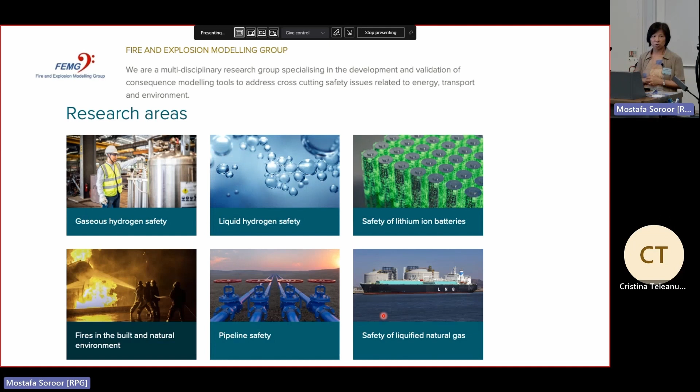We do download OpenFOAM, but we have our own versions where we put our submodels in, whether it's for the physics, the chemistry, the transition, evaporation. So we do all those sorts of things. Partly because of my interest, and partly also to ensure that publications from the group, for the benefit of the researchers, get into the top academic journals rather than just industrial applications.

So the majority of my talk will be based on hydrogen. I will talk about work in the gas hydrogen safety area as well as the safety of liquid hydrogen. And in the end, I hope to save some time to talk about the wildfires, which is my new hobby.

I don't need this animation.

What I'm trying to say is in potential accident scenarios, we are moving now towards a hydrogen economy, and hydrogen is going to be a major energy carrier. In that process, there's the production of hydrogen, the distribution and transport, as well as the storage, and finally the utilization. Through that process, safety is paramount, because there can be accidental releases of hydrogen, whether it's gas or liquid, and there are various scenarios which can happen, as I illustrated here.

Although hydrogen is really light, so it does have some benefit. If it's dispersed quickly into the atmosphere, that's good news. Liquid hydrogen, when it comes out, evaporates quickly. The volume expands by more than 800 times, so it's an enormous cloud. But if it can disappear quickly into the atmosphere without resulting ignition, then that's good.

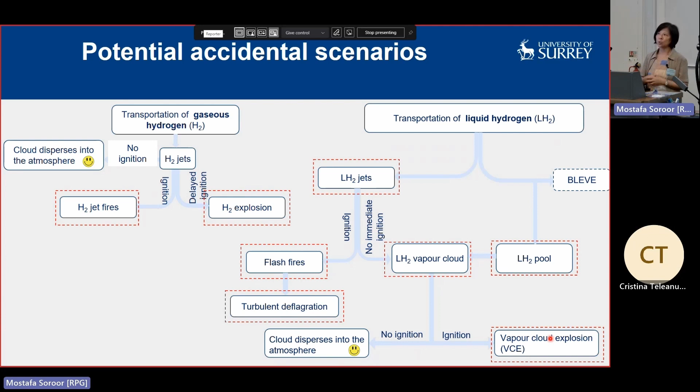So I will start with spontaneous ignition. It's less likely in the UK, hydrogen-powered fuel cell cars, but we do have some demonstration vehicles running around in the UK and more in the US. Typically in hydrogen fuel cell powered cars, the hydrogen is stored in high pressure cylinders. The Toyota Mirai stores at about 700 atmospheres, so it's 70 megapascals. And in refuel stations, gaseous hydrogen under pressure, 100 bar, is still a current commercial way of storing hydrogen, while liquid storage is another form.

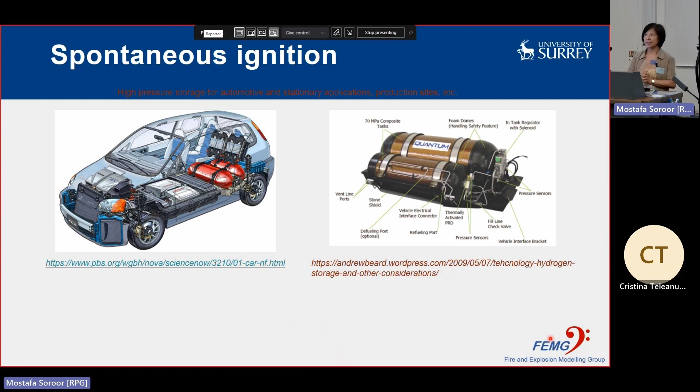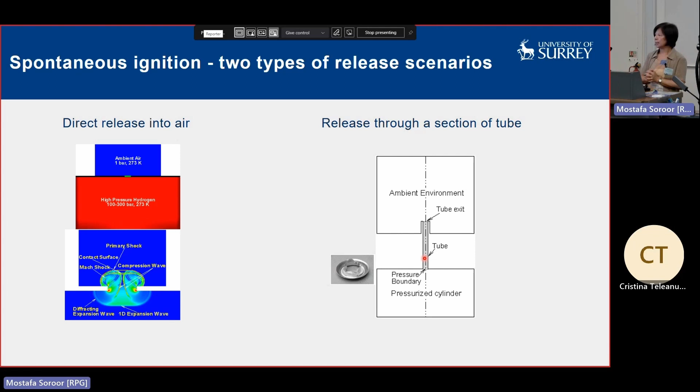Under such high pressure, the early work we did found that if there's a release from a pressurized storage vessel, shock waves develop, and at the front of that shock wave there's hydrogen interaction with the air, molecular mixing, which pushes the temperature up, and you can get spontaneous ignition, through a section of tubes. In most applications, hydrogen doesn't come out suddenly from a crack. It's more likely the connecting pipes are the weak points in the system, and if there's a rupture, hydrogen comes out through a section of tube.

There are experimental as well as numerical simulations done by my group which indicate there's great potential for spontaneous ignition in such situations. So theoretically it's possible, and experimentally it's captured by experimentalists in the UK, HSE, and in Japan, Russia, and China. So there are various experiments.

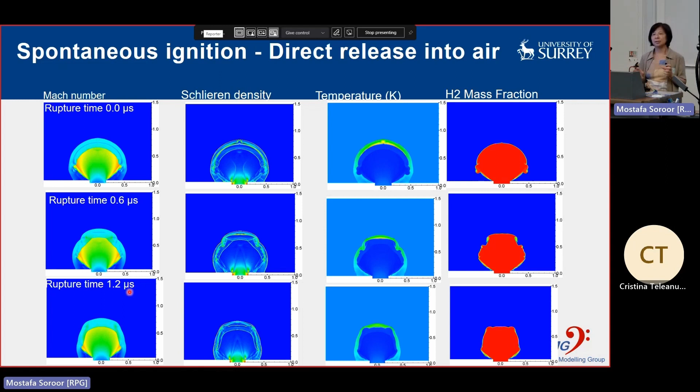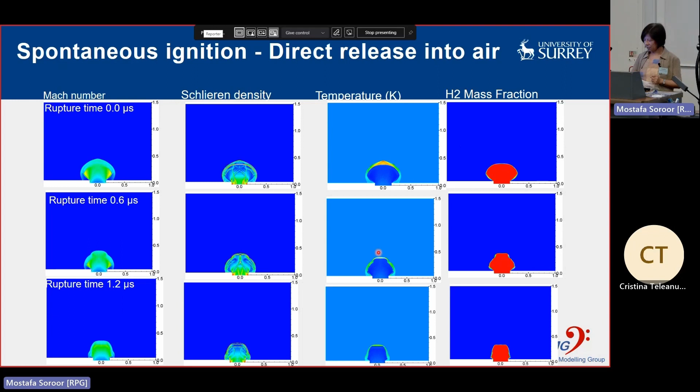What's shown here is the rupture time. If it's 0, that's a sudden release. If rupture time is 0.6 microsecond or 1.2 microsecond, we are trying to mimic practical situations where you don't really have sudden release; it takes time for a storage vessel to rupture. What we found for direct release is that in practice it's unlikely to result in spontaneous ignition. The temperature at the front would go up, but it quickly went down. It's diluted and quenched by the surrounding flows.

But in situations more likely in practice, released through a section of tubes, we are finding it's more likely because of shock reflection. You see here the shock waves reflecting from the tube walls, and the heating of the front of the hydrogen-air interface, which is more likely to result in spontaneous ignition, which can translate into a jet fire, which is the next topic.

But what I want to say is that behind all this and the animations you see here, we actually did a lot of development. I should clarify, this part is not done with OpenFOAM. I forgot my title is OpenFOAM. This was done with the KIVA code, which was developed for internal combustion engines by Los Alamos Laboratory in the USA. The reason we did it with KIVA rather than OpenFOAM is a key limitation of OpenFOAM: in terms of numerical schemes, it won't go anywhere above second order.

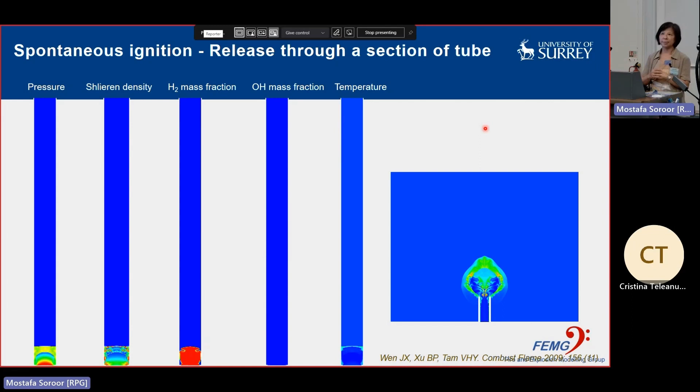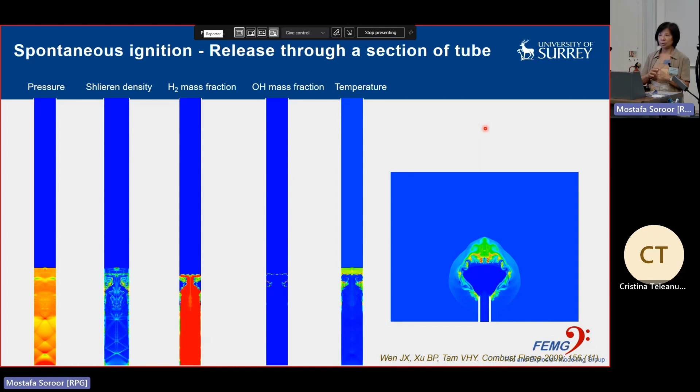Well, for this one, we need high order numerical schemes. This is a WENO scheme, which we implemented into our code, and we tested the third order, fifth order, and ninth order. And also, in order to capture these numerical simulations, we actually had to use very, very fine grids. So the grid resolution used in these simulations ranged from 5 microns to 10 microns, to 50 microns, to 20 microns. We tested a range of them against the classical scenarios where there are analytical results. So there's a lot behind these animations which I didn't talk about.

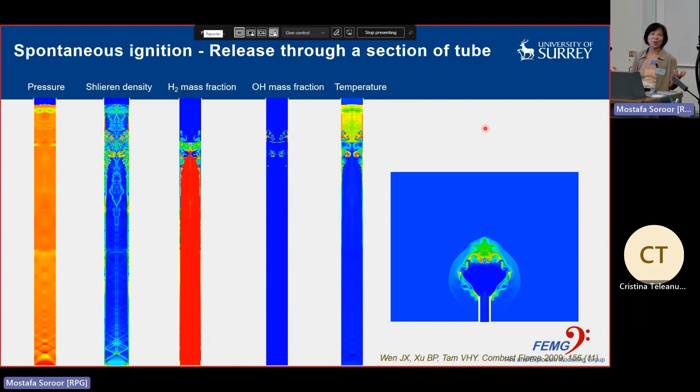And so what I have shown here are the advanced laser diagnostics which researchers in Korea did after our simulations. We did those simulations around 2008, 2009, and afterwards researchers in Korea did experiments. So qualitatively, we are capturing the phenomena which they saw: the near wall ignition, the shock focusing, and the transition from the spontaneous ignition to a jet flame.

But we didn't make a quantitative comparison because the grant finished. The grant finished after they did the experiments. We moved to do other things for hydrogen. And one of the other things we did was jet fires.

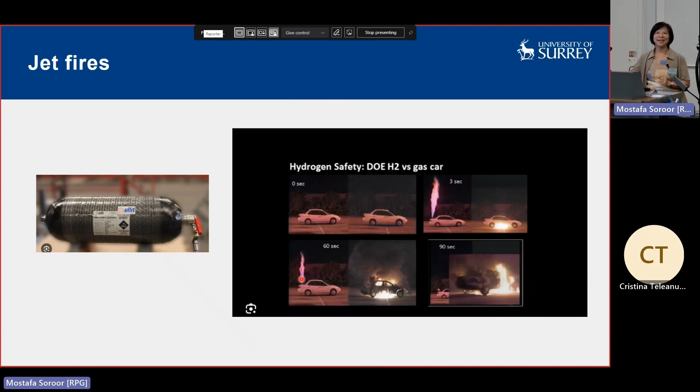Can I ask the audience? You can cut short my question time if I ask the audience now. Looking at these two fires, which one do you think is a hydrogen fuel cell car? Which one is gasoline? I'm not going to move my pointer. If you think this one is gasoline, put your hands up. How many people think this car is gasoline? Nobody. That's really good. So I don't need to explain jet fires, and I won't need to talk about this.

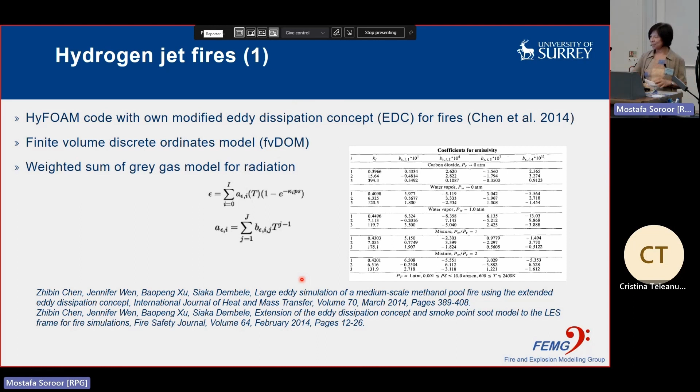What this is trying to show is how we treated the thermal radiation, and I'm going to bypass these developments. And this is again a pseudo diameter treatment which we use. The reason we did that is, for spontaneous ignition, I was talking about using 5 micron, 10 micron grids. When you go to a major fire and the jet fire, you can no longer do that. So we use a pseudo source to bypass the shock region, and then we ignite the jet,

which in practice, most ignitions of hydrogen, I think, are still by sparks or even mechanical friction, rather than diffusion-based spontaneous ignition. But the thing is, in most accidents, I was listening to some industry talks even last month, it's not clear what caused the ignition, even to the operator. So it's a mystery there.

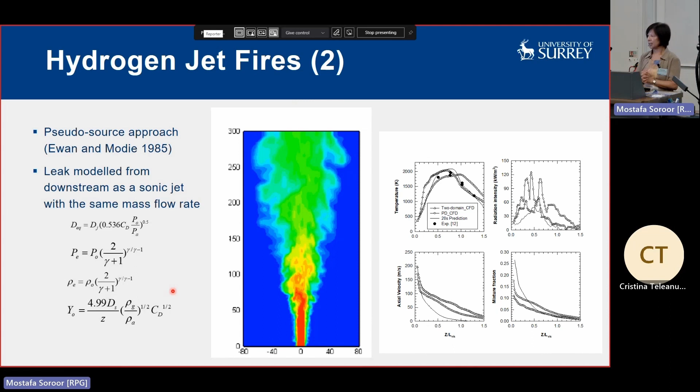So in jet fire simulations, we don't do those shocks. We bypass them with simplifications. We start from a pseudo surface where the pressure has reduced to atmospheric pressure, so we can use larger grids. And we look at the flame length. We look at the radiation levels and the radiative fractions and compare them with the experiments.

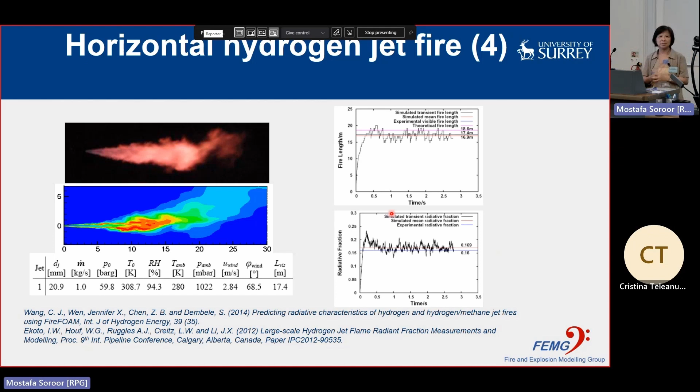What I would say is that in real situations, although we've done this detailed study, for jet fires, if you are not considering the obstacle effect, one could do well with some simple correlations, which I'm comparing with here. And the reason why people are still doing numerical simulations for jet fires is because operators need to consider them in connection with the fire impinging on surfaces and the environmental conditions, especially if this happens in a room like this.

And then another thing is when we talk about hydrogen, people think about Hindenburg, they think about explosions. So we have done explosion modeling in collaboration with some industrial partners who do experiments in a European project. What I'm showing here is experiments sponsored by Shell, and the tests were done at HSE, not far from here, pointing a jet fire.

This is really a worst case scenario. It doesn't mean it's going to happen all the time. It's a worst case scenario, pointing the nozzle directly at the floor. So you created the immense cloud. You also created that momentum, as well as the congestion underneath this model car. So we were using OpenFOAM to look at the explosions, comparing the overpressure.

And for this part of the work, I must say we did the least amount of modification to the code. What we did do is implement some correlations for hydrogen-air mixtures and the modification of laminar flame speed at different concentrations and stoichiometric equivalence ratios. So we did relatively little modification to OpenFOAM for this one.

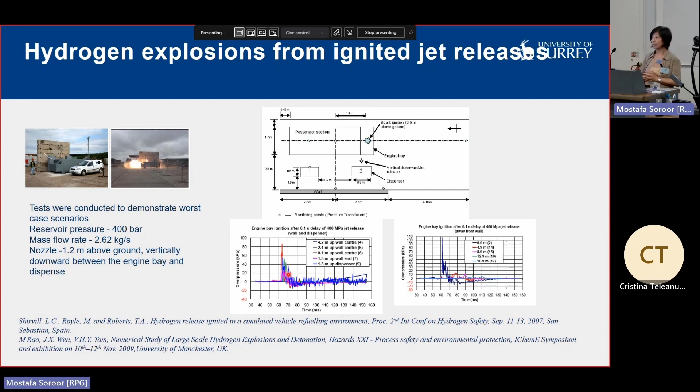And another thing which we did for this one is we also got to look at the ignition and how to ignite that in running the code. Sometimes, as a PhD student in fluid dynamics, you just spend your time on code modifications. So sometimes what we found is even if you don't modify the code, or with minimum modification, even getting a scenario to run on the computers takes a lot of skill, and how to treat the ignition and how to look at the boundary conditions, environmental conditions. So I think a lot of time was spent on that for this one.

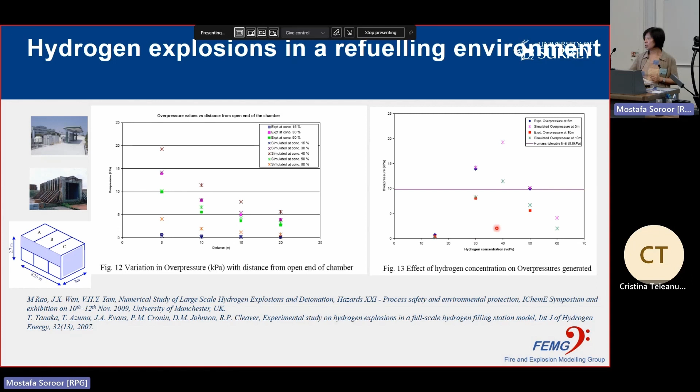And then we also looked at the other scenarios, again using the code to help evaluate the safety distances from a mock-up storage room like this, to see at what distances the overpressure could reduce to 10 kPa, which is the maximum allowed without causing too much negative effect to a human being there. And we do say that this is about the stoichiometric region. Around that region, you do get the highest overpressure.

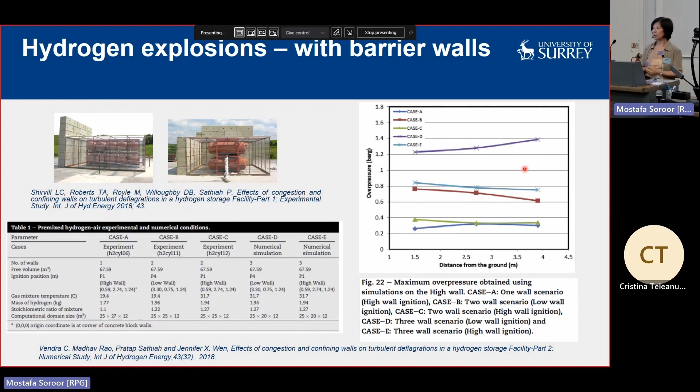And as I mentioned, more recently we've been working in a European project, and now I'm launching my own joint industry project on liquid hydrogen. The reason for that is hydrogen is light, its density is very low, and to store large quantities for the hydrogen economy, you either store it in high pressure tanks, like what you've seen, or you store it in liquid form. And also with the development of aviation and marine applications of hydrogen, we are going to see more liquid hydrogen storage

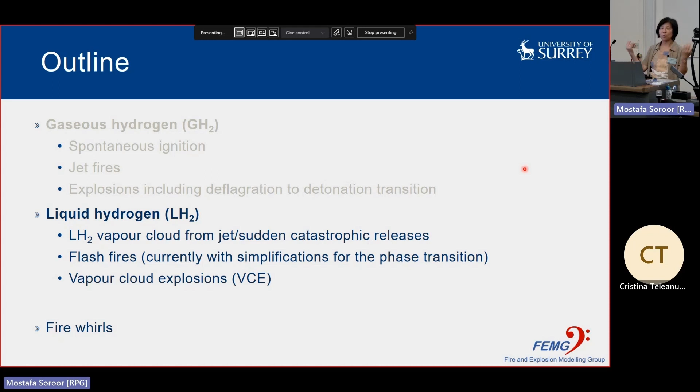internationally. But the concern is, at such low temperature, about 20 K, one would think that it should be safe. It's so cold. But it has its safety implications. As I already mentioned, it expands by more than 800 times with an accidental release.

So one thing which we looked at, we worked with Air Liquide, which is a French industrial gas company, to look at what's the effect if around the liquid hydrogen tank we put some bund to restrict the spread of the liquid in case of accidents, rather than it going too far away, and to look at the evaporation, the phase transition, multi-phase flow, and the dispersion in the atmosphere. So we did that work, and that work actually constituted a part of my impact case study for REF 2021. It's quoted in the REF. The work was also sponsored by a university Impact Acceleration grant.

I remember when the university asked me to apply for that, I said, no, I'm not applying for internal money. It's my job to bring grants to the university. It's not my job to ask for money. Then the university said the impact is worth lots of money to the university. By giving you this money, you generate another small example for the impact case study that could be really important. So that's how this work got done.

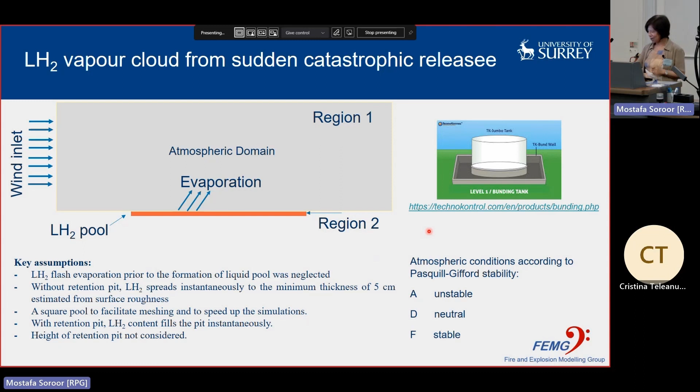And I will bypass the little bit of modifications. And there's a limited amount of data for validation.

What I'm showing here is some NASA experiments done in 1984 for liquid release, and they look at the cloud, and we made some comparisons in terms of the visible cloud and the vertical extent of the cloud, as well as the duration of the visible cloud. And so that's the only set of data we could find at that time.

But I'm pleased to say now, I think Sandia National Laboratory is trying to do some more tests like that. But initially, the results of the new test will probably be confidential, because the Sandia new test is sponsored by KGC in Korea. So I don't know how soon it will come out.

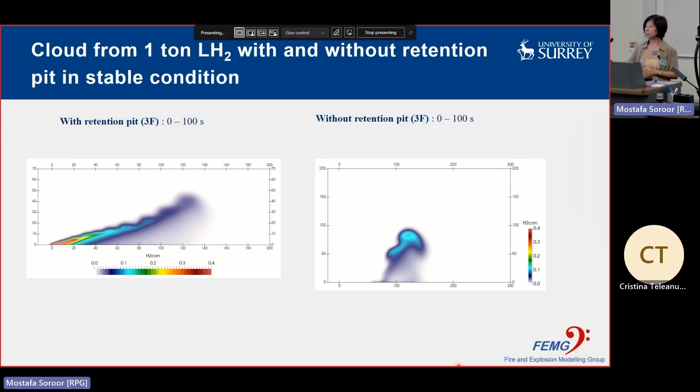So with that validation, we then analyzed them, and we compared them with or without that retention pit, or that bund you saw in the picture, to see what's the effect. And the conclusion which we draw from that study is that you have to analyze it situation by situation, the atmospheric condition and the size of the bund, because using that bund around the storage vessel, you do limit the size of the cloud, but its duration becomes longer. So it's more confined in that bund, and the evaporation is slower, dispersion is slow, but it lasts longer.

So I talked about hydrogen requiring little energy to ignite. So if the duration is longer, then it's more likely it could bump up with some ignition source. So really the operator's conclusion after doing this work is they would analyze it based on the local situation, but they do consider that the bund has some effect in certain situations.

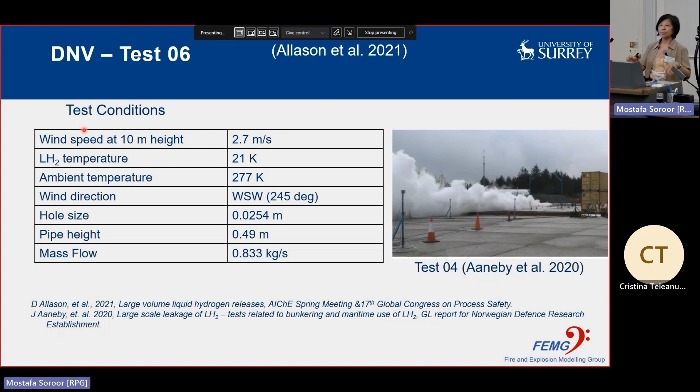And so these are the more recent tests, and it's done at DNV Spadeadam. Remember Spadeadam used to be under British Gas, and now it's been resold many, many times, and it's under DNV. They did some tests for the Norwegian ferry companies on horizontal jet release of liquid hydrogen, looking at the flashing, the dispersion, and so these are the test conditions.

And we did some simulations, and one thing which we found is, again, to re-emphasize the statement made: for such large scales, it's really difficult to compare point by point. You really got to look at the average, look at the trend. But here, even by looking at the average, I think our predictions are not that good.

The reason for that is we made many simplifications, and especially we were not considering the pool spread and the evaporation, and we were also not considering the humidity in the atmosphere, and when those clouds and hydrogen jets come out, they can also freeze the moisture in the air. It can even freeze some oxygen in the air. So we have simplified the physics in this one because it was a quick trial which we did as preliminary work for a proposal rather than a research project.

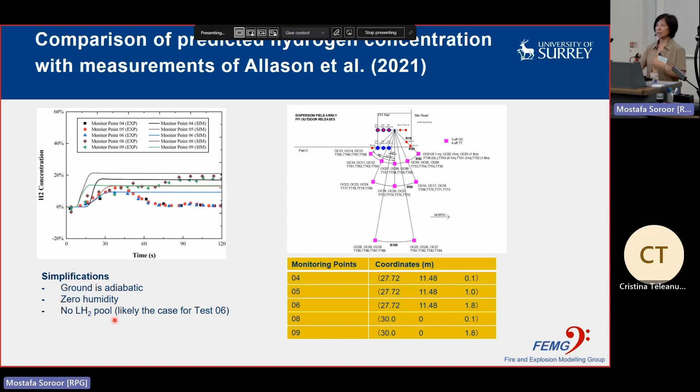And we also did some exploratory study. I call this exploratory study because there's no validation. We're looking at the liquid hydrogen jet coming out and ignited. We look at the jet fires, in the case without wind, or the next one with wind, and so it's blowing more horizontally.

We are hoping in the new joint industry project, which will start next year, we'll be able to do some validation. And this is some preparatory work to see that we've got the potential to do it. But to do it properly with validation, we need some phase development. For example, in this one, we are bypassing the phase transition. We assume instant flashing and cold hydrogen gas, cryogenic gas at 20K, rather than liquid going through the flashing process.

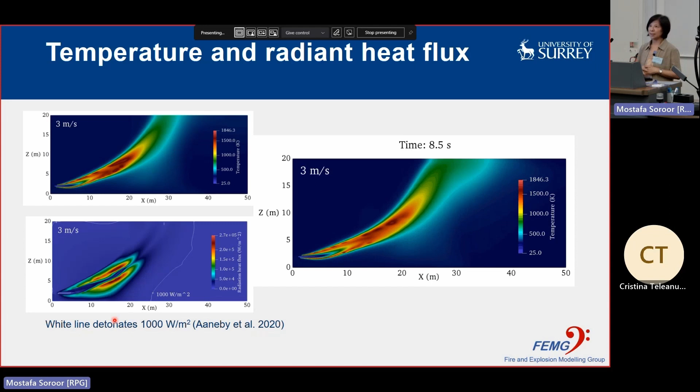So even in the safety domain, I hope when looking at my talk, some student may say, I'm not trying to grab students from here, but what I want to say is that even though it's reactive flow, in our topic we do need a lot of people with a fluid mechanics background, with solid fluid mechanics theory, and the numerical models especially. And in my team, I'm always looking out for postdocs who are interested in code development. I don't take postdocs who just want to use the code. Students I may take on, but postdocs all have to develop codes, and they don't have to have a combustion background. With a fluid mechanics background, they will learn combustion very quickly.

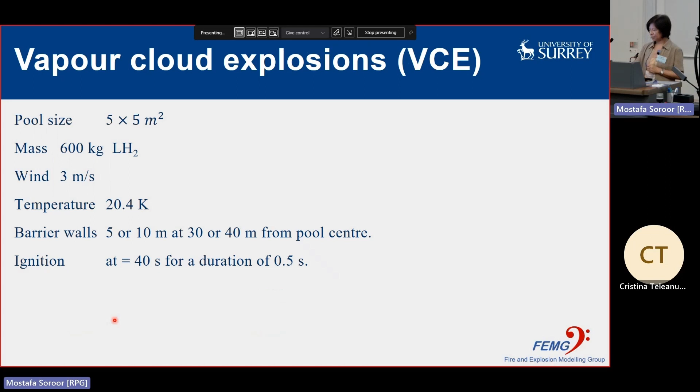And so vapor cloud explosions, this is again from cryogenic release with simplifications. And so it's an illustration of the overpressures and the temperature evolutions.

So the concern for vapor cloud explosions: this can happen, for example, when you have liquid hydrogen bunkering, for example at the airport or from ship to shore, and when we have large boats of liquid hydrogen come from the Far East. In those environments there could be semi-confinement, and there's very little knowledge about the likely overpressures which can result from semi-confined or confined

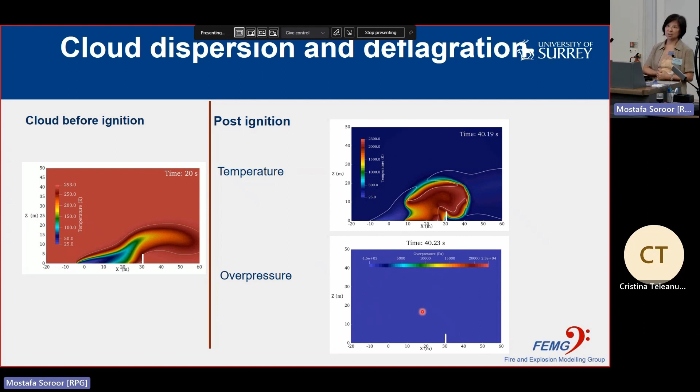So a quick conclusion about the hydrogen work, before I give a quick introduction about the fire whirls we are doing now. We have developed the codes for various scenarios related to hydrogen, and this is a growing area where we have serious skill shortages, not only for people to do risk analysis for industry, but also skilled researchers who can develop and modify codes to tackle some challenges.

For some of the challenges, if you focus on the fundamentals, there's really a lot you can do, but not every researcher is able to dig into those fundamentals. And finally, just a quick run through the Leverhulme Trust funded project on fire whirls. With global warming, wildfires are becoming more and more of a concern. Even in the UK, we've had wildfires in the Highlands, and we also had bushfires and peat fires.

So we are looking at fire whirls. This is a special phenomenon which occurred after the famous 1923 earthquake in Japan. The swirling flows came from the wind around the buildings and drove the fire to shoot up very high. That's why in the media they also call such fire whirls fire tornadoes. So what we try to simulate is L-shaped fire whirls, which happened after that event.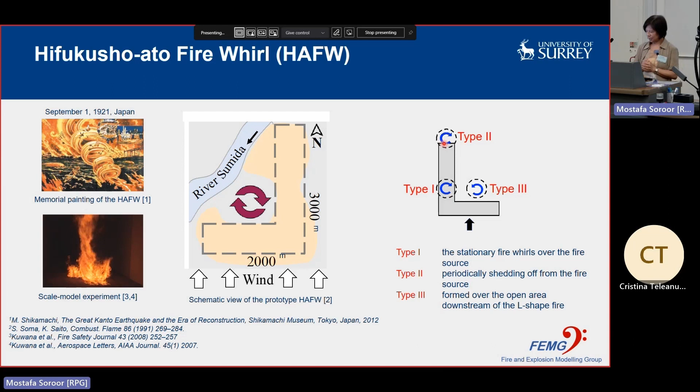They had an initial fire whirl of type 1, then a fire whirl in the middle, and a fire whirl further downstream. Some Japanese researchers did a reduced scale experiment, so what we tried to do is simulate that experiment, developing models. I should mention FireFOAM, which is a fire simulation solver within OpenFOAM.

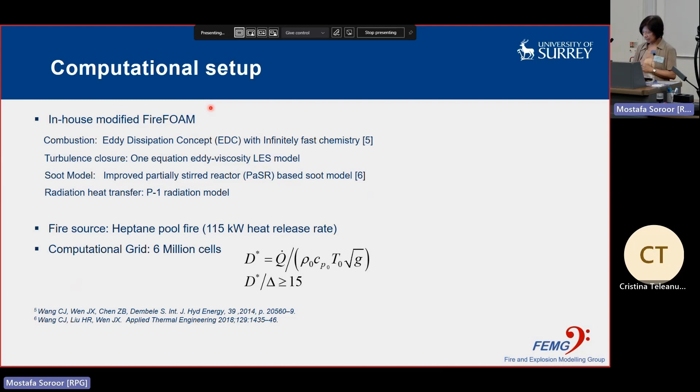My group has been sponsored by FM Global for many years to add submodels for combustion, soot and radiation into FireFOAM. So this is an application of the FireFOAM code which we helped to develop. What we did was add this vorticity equation. I mention this because the next speaker will be talking about vorticity. I'm looking forward to it.

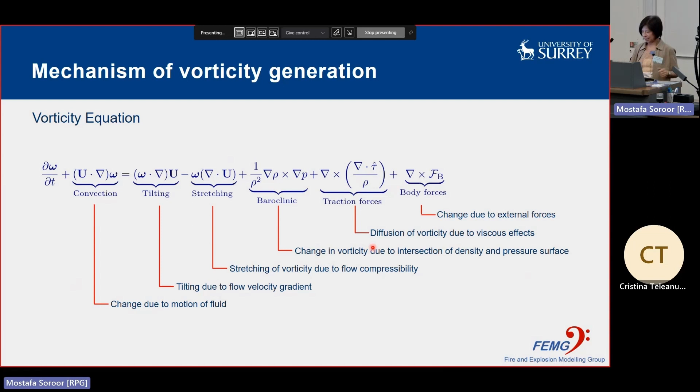We don't have to add this; it's already in OpenFOAM. But the reason we added the equations is to get the code to output these different terms to a file so we could analyze it. Otherwise we wouldn't need to do it. So we wrote this equation in there so we could output all this to different files, plot and analyze it. I think that's my last slide; I know I'm running out of time. So we look at the scenarios.

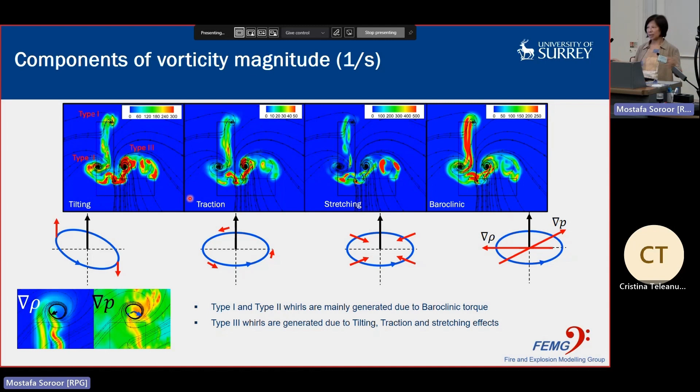By adding those equations and looking at the terms, we were able to come to this. At the moment this is still a much reduced scale, and we use LES with relatively fine grids to look at the terms. We have another year in the project, and we have to try to speed up, because to look at really large scales we will probably have to go to RANS eventually. We are still trying to hang on with LES a bit longer before we move to large scale applications, looking at the limiting conditions for transition from a fire to a fire whirl. So that ends my presentation.